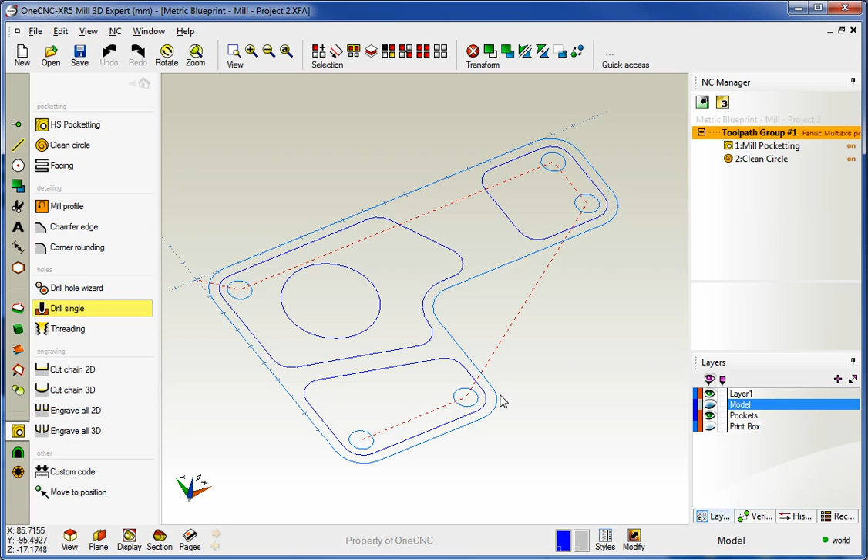Once we're done with that, we right-hand mouse click, hit finish, and then we go to work. But in this video, what I'd like to do is demonstrate this operation here called the hole wizard. I'm going to zoom out and pan down just a little bit to give us some more room. I'm going to go with drill hole wizard, and just left-hand mouse click.

As soon as we do this, OneCNC automatically scans the graphic area, and it categorizes or groups the holes into separate groups based upon their diameter and depth. So you can see OneCNC has found two groups of holes, and as I left click on each one of these groups, OneCNC verifies the selection by showing that selected in red over here within the graphics area.

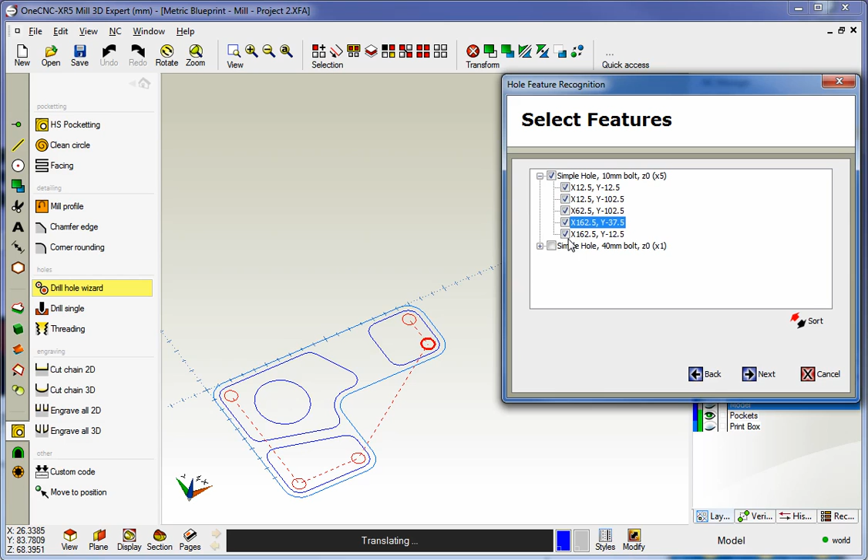Now let's say that you and I would like to drill these 5 holes. To do that, all we need to do is just check that box right there. Notice also that you can expand this, and you can also deselect holes if you want. But in this example, we're going to drill all 5 holes, so I'm going to leave those alone. Once we do that, we'll click Next.

Here's our clearances dialog box. I have a rapid Z-plane set to 10 millimeters. Our plunge clearance, this is where we're going to start to feed down, set to 3, and our material top set to minus 15 millimeters. Now the reason why it's set to minus 15 millimeters is each one of these pockets has already been machined to minus 15. Let's go with Next.

Alright, so within the settings dialog box, you have the ability to select multiple machining operations for the holes. So for example, we could center drill, countersink, and then tap all those holes. So one of the advantages to using Hole Wizard is you can perform multiple machining operations to your holes.

Now I'm going to keep this simple. I'm going to right-hand mouse click. We'll select Remove All. I'll click Yes to confirm that. And why don't we just drill these? So I'm going to just left-hand mouse click on that.

Over here on the right-hand side in this blue area, this is actually a preview of the cross-sectional view of your holes. Now right now this is blank because we haven't filled anything in yet, but as we start to fill in parameters, this preview area will start to come to life.

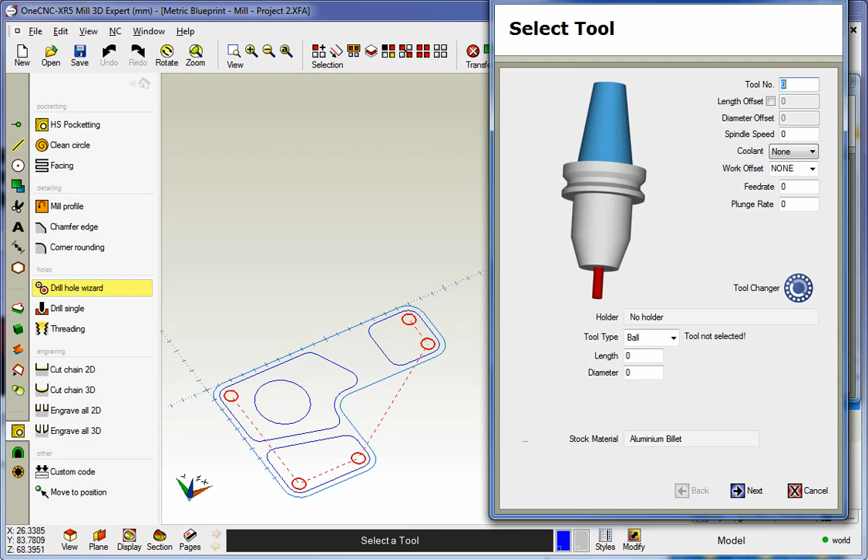Now to fill the parameters in for this drill operation, just simply take your cursor and double left-hand mouse click. Once we do that, we get this dialog box, and you've seen this before. This is where you want to select your tool. You can select it from the tool library by left-clicking on the graphic or tool changer, or you can manually define a tool. In this example, I'm just going to manually define it.

We'll say it's in turret position number 3. We'll give it an RPM of 3000. I'll select my coolant, and for a feed rate, I'm going to put in 0.5 for that. There's 2 feed rates, X, Y, and Z. The reason why there's 2 is because you can do more than just drilling operations. You can in fact perform milling operations with an end mill, for example.

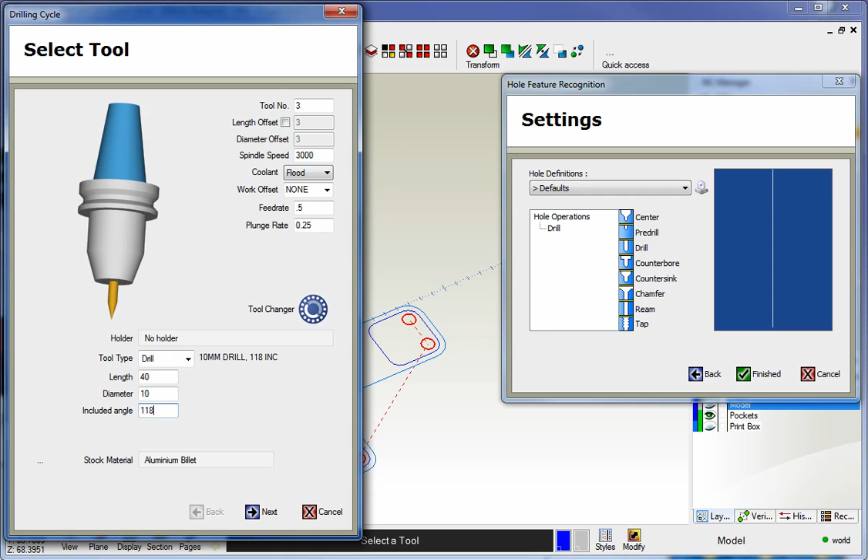So all this looks good. Let's change this now to a drill. We'll come down here and select drill. That looks good. Alright, for the length, this is how far the tool sticks out past the holder. I'm going to put in 40 millimeters for that. For the diameter, we'll put in 10. And then the included angle, I'm going to put 118. So you can see this is your included angle right there.

All this looks great, so we'll click Next. Okay, so under hole style, you have machine cycle and automatic drilling. Machine cycle is if you'd want to use a can cycle like G81, G82, and G83. If you don't want a can cycle, you would select automatic drilling, which would output just simply rapids and feed moves, G0s and G1s. If you want to machine the holes using like an end mill or something, you can select profile, helix, or clean circle.

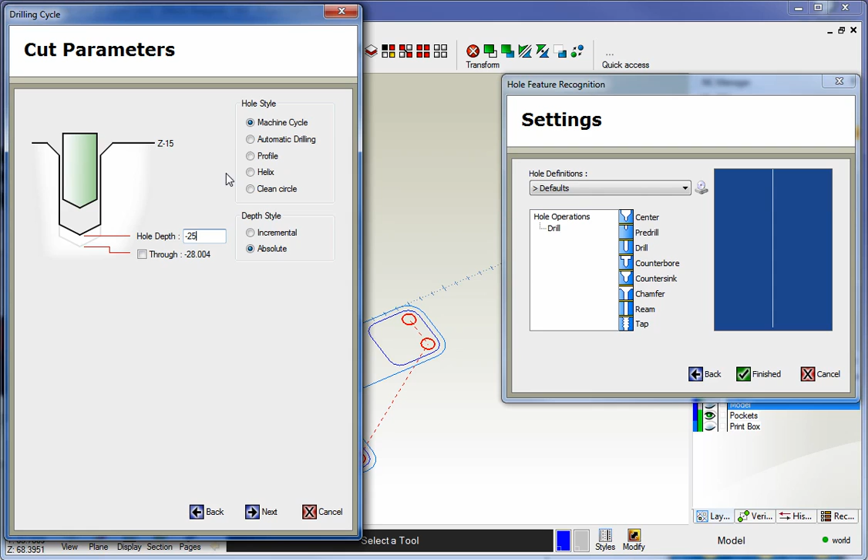But I'm going to go with the can cycle. For the hole depth, I'm going to put in minus 25 millimeters. That looks good. And because I have the machine cycle selected, when I click Next, OneCNC is going to give me a group or a list of can cycles I can select from. I'm going to go with the G83 deep hole, and for the peck amount, I'm going to put in 4 millimeters for that. Go ahead and click Finish.

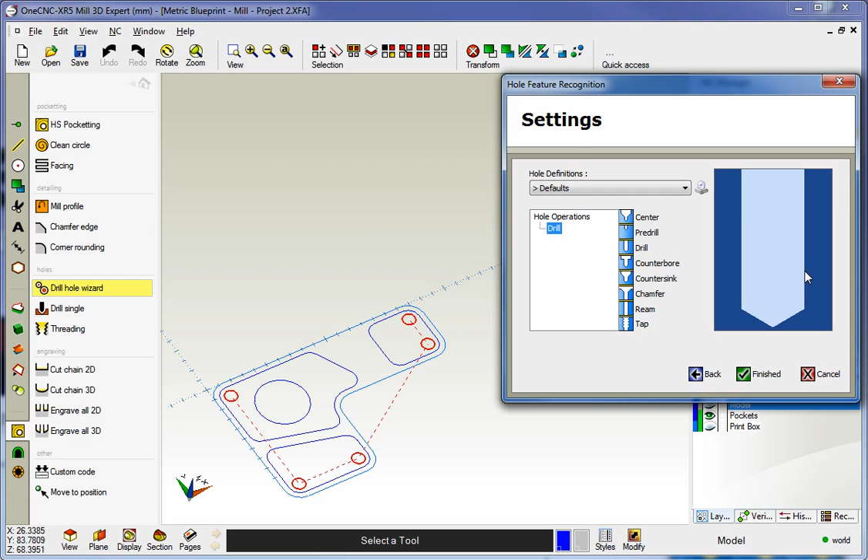As soon as I do that, you can see our preview area has come to life. So there's a cross-sectional view of the hole. If I had performed a counterbore or a countersink, you'd see that up here as well. So this is just a nice confirmation to make sure that we have these parameters filled out. Once we're done, we can click Finish.

That looks good. And there's our drilling operation. Why don't we preview this? I'm going to right-hand mouse click, and let's bring our solid model back. That looks good. So we'll right-hand mouse click, and let's select Preview and take a look at this. That looks good.